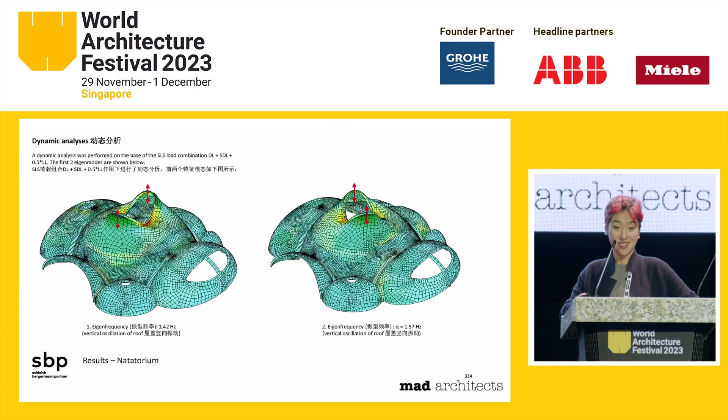To start with, I'd like to go to the very end of the PowerPoint, if possible, to present a brief video we made with Ma trying to explain his design philosophy. We'll go through the whole thing, and I'll come back to it later.

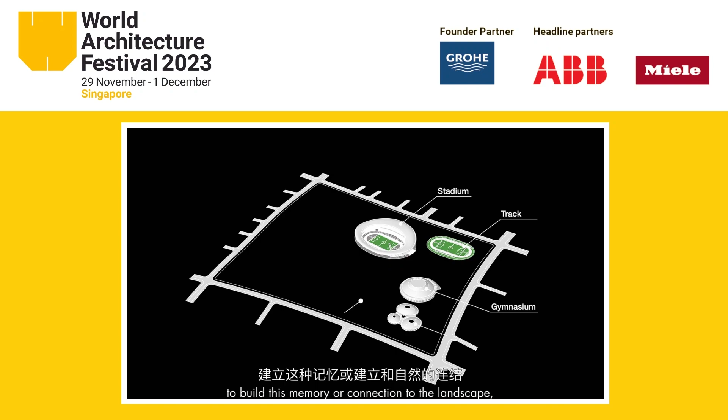Quzhou is very special because of the landscape. The original landscape was very natural, very relaxed. Those landscapes have been here for a million years already, and now we're changing them. To build this memory or connection to the landscape, we created a space that's similar to the beautiful landscape around it.

I consider this space a void in this new town, because we often talk about objects, functions, those positive things, but I also think architecture can be negative, can be a void, can be a space. We want the architecture to disappear, and we need a space for people to have a moment to dive into another dimension of space and time.

So I want this space to be very engaging and inviting, and in interaction with the public.

It's a little bit like a land art project. When you enter the park, you see the future mountains, like green volcanoes—it's quite an artificial, surreal environment. When you look from outside, right now you don't see this concrete thing underneath the landscape. You only see the steel roof, looking like a floating cloud above the green mountains.

It's very light, but when you enter the building, you find out the structure inside the mountains, underneath the green. I imagine those spaces to be very strong, very heavy. And when you see those columns, they have a rhythm. I find this a discovery process.

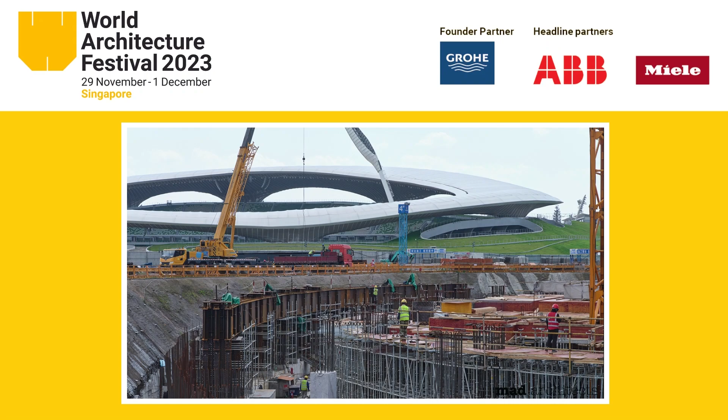And then I'll go all the way back to the beginning of the presentation. Adding, that's pretty much well said about the design philosophy for this whole thing—just adding to what hasn't been addressed in this video, since unfortunately he couldn't make it himself to be here.

We dive into the whole history and background of the city before we started the design of this project. Quzhou is the biggest city in Zhejiang province, which is right next to Shanghai in East-South China. It has a really long history—the descendants of Confucius moved to Quzhou in the Song dynasty—and it has a really beautiful landscape.

We looked into the archives of the city, and it has the most World Natural Heritage awards from Southeast China, and is well known for its openness. It also started the agriculture, and started the exchange and market of livestock, and became what it is today.

Nature, landscape and mountains are an important part of this city, which is covered 50% with mountains. So if you look into it, it's such a huge city in terms of size, but it only has 2.5 million population—it's not like any other mega city around it.

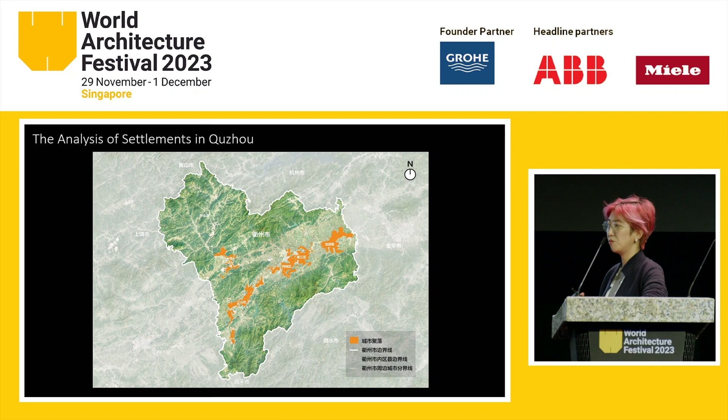Instead of creating something muscular and powerful, we decided to turn everything into a big park that everyone can enter—really accessible to everyone. So that's the whole master plan.

The stadium has 30,000 seats, and that's phase 1, which was completed last year. Phase 2 has a gymnasium and natatorium, and also 3 training centers.

The whole master plan is connected with civic roads, so people can get in and out very quickly, even on their everyday commute to work. There's no cutting off the whole area in the city—you can drive past or cycle past it. It's combined with pedestrian and running ramps, creating this landscape and mountain.

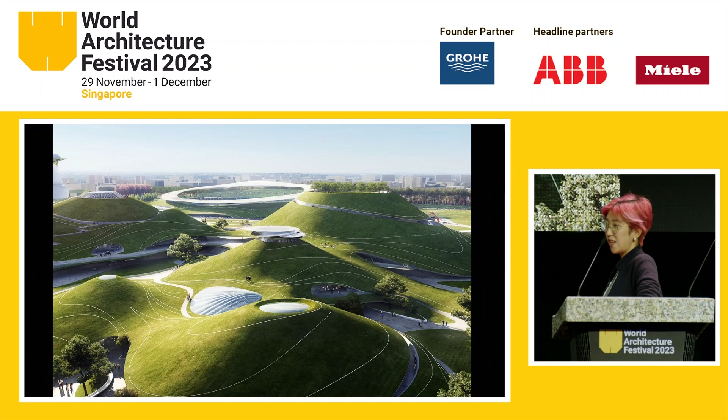What we're trying to do is replicate a natural landscape into the new high-density city and turn it into the sports buildings. That's the render—you can see the height limit and the height control and everything.

And then these are the photos of the stadium you see already pretty much in the video. Several things we want to emphasize: since its completion, there are already many youth and child sports schools being established underneath this stadium within the office. So every weekend is occupied.

But what we'd like to further emphasize is the landscape and how we really replicate nature into the city. We did a very careful design together with the landscape architect to rebuild an ecosystem, and also to recycle, to rebuild the whole water system.

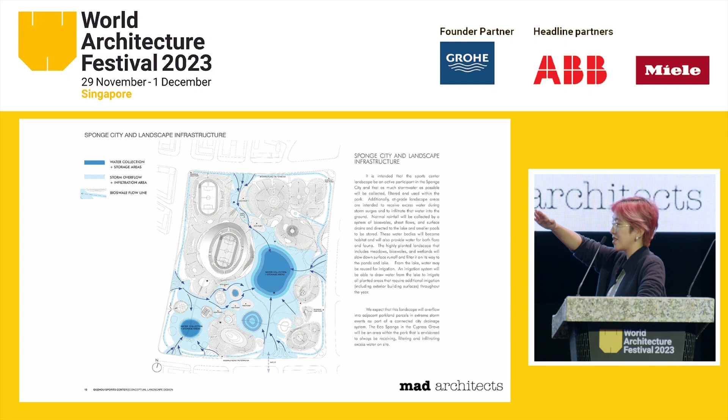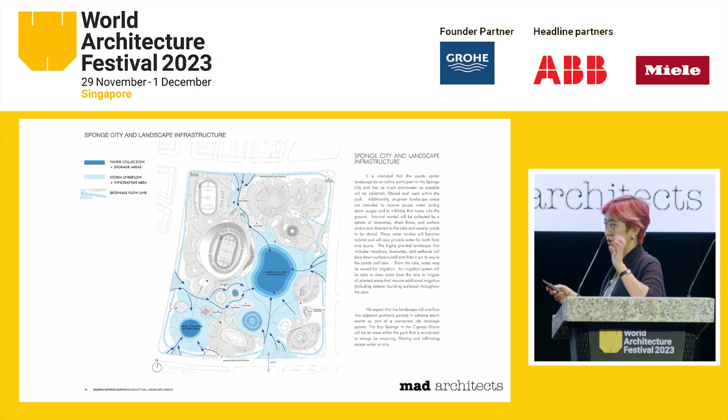So when the rain comes, there's grass and earth on the roof, also with the water draining down, and with the different layers of design of the slope, we actually have a lot of sunken gardens to store the water from the rain, from the storm. And then it's connected with the civil engineer pipeline underneath, and everything goes back cleanly to the city, and also to the water.

You can see there's a beautiful river right next to, not far away from the stadium site. And also the lake is an existing lake. We try not to destroy it, but to work around it.

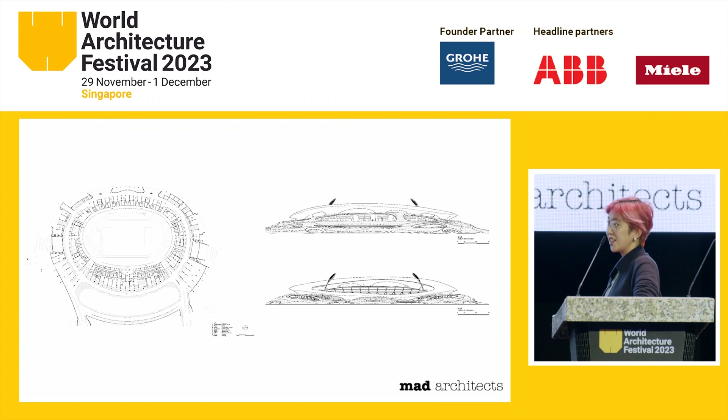We also chose carefully a local plant, the seasonal grass, so everything turns yellow in the winter, but it can grow organically. You don't need a lot of maintenance or watering it, it just stays there like a part of the natural grass. And the structure is also a big challenge to make happen.

It is probably the biggest earth-sheltered project in China, and probably the biggest in the world. The whole stadium has two floors, and all the supporting structure is concrete, 60 concrete ribs making a nice area of rhythm to support the whole thing.

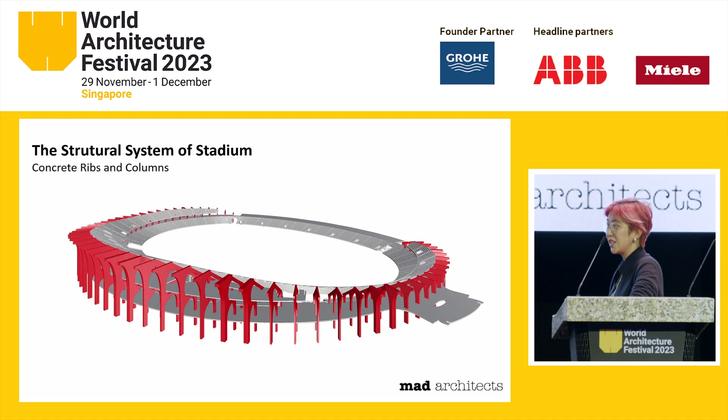And all the concrete is made and cured and fabricated locally, which is what we're trying to do to construct sustainably, but also to create the poetry, the beauty of the shape.

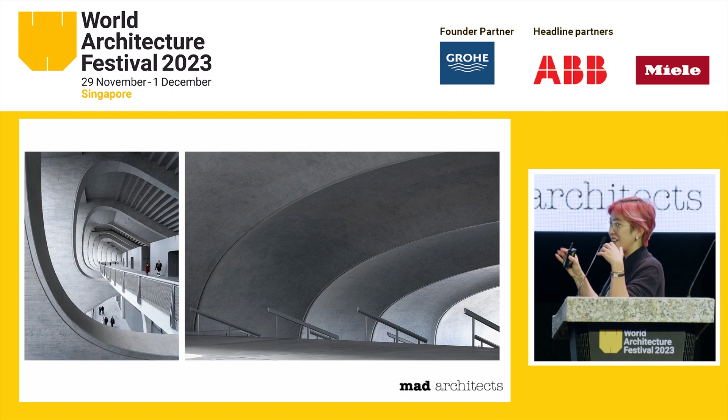And it supports a really lightweight structure, like the floating cloud on top of it, with a PTFE double layer. The bottom layer with holes can absorb all the sound from the activities, and the top layer is for rain, wind and weather cover.

There are a lot of other technical questions, but the whole purpose of doing this is to give it back to the people, to make the stadium not only a power-showing for the athletes and the games. Right now it's really popular. All the city, all the residents and all the tourists like to go there. And it is 24 hours, 7 days, open every day to everyone.

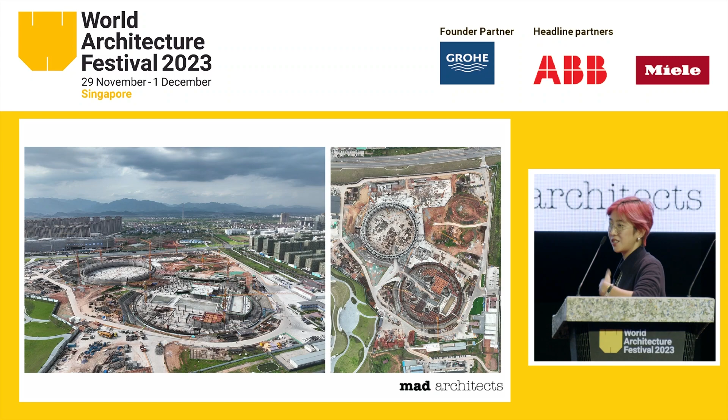So yeah, that is my brief presentation. Thank you.

I'd like to jump in first. I know a lot of young Chinese friends, some of whom I've taught or who've worked for me, have gone to Ma's office. I know it's a sort of hotbed, like a finishing school for some of the smartest kids, I think not just Chinese.

I really want to think about it as a proposition, one that you nearly pulled off, but perhaps your wish to demonstrate architecturally got in the way. My analysis: it's a roof and a landscape. Now, a couple of schemes back, we had another roof and a landscape, slightly different, perhaps a less manipulated landscape, and a slightly different roof. But nonetheless the proposition of the roof and the landscape, and then the building was creeping out, but it crept up fairly discreetly. What's intriguing to me is that if you'd pulled it off totally, it would have been a roof sailing over the landscape.

But you're hot young architects, you want there to be a bit of architecture showing as well. And that, in a way, conceptually, to me, is a slippery slope, because the more you want the proposition that the roof sits on this beautiful landscape, but then there's a bit of this, and a bit zigging, and then something else popping out there, you've almost lost it. Because again, it's another stadium with stuff, the landscape creeping up on it, and the separated roof, but the stuff is there.